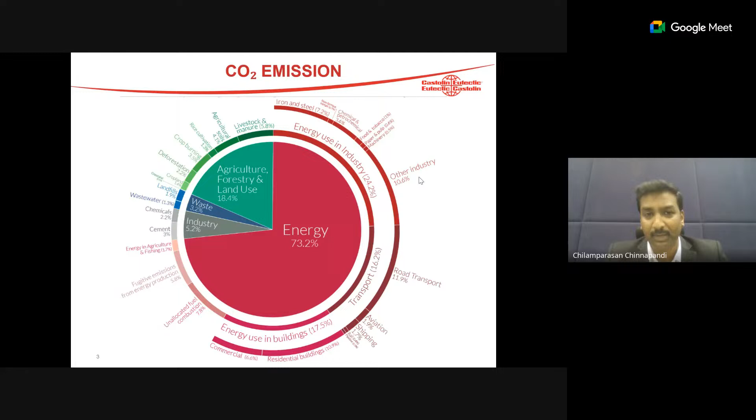So what is happening with the CO2 emission? How is it going to affect things globally? It's affecting the impacts and consequences of CO2 emission, which is rising the global temperature. Especially people aware who are already living in the Middle East know the current scenario this year. The summer has started very early, and when we go out we feel that we are in a furnace. And year on year, it is going to increase, obviously.

But from our part, how are we able to reduce CO2 emission, especially for industrial growth, that is what our focus is on.

So what is happening with the rise of global temperature: shrinking water supplies, geographical changes, changes in weather patterns, changes in food supplies, acid rain, and increasing sea level. All these are happening because of the CO2 emission currently happening.

I'm not an expert in the environmental field, but we are into maintenance and repair, through which we can help the world work together. That is our objective today.

So how can Castolin give you sustainability? Welding can give you sustainability through technical systems and efforts, offsetting against the consumption of resources and quality. In general, if any component breaks down or gets worn out, what people generally do is skip repairing and just go for replacement.

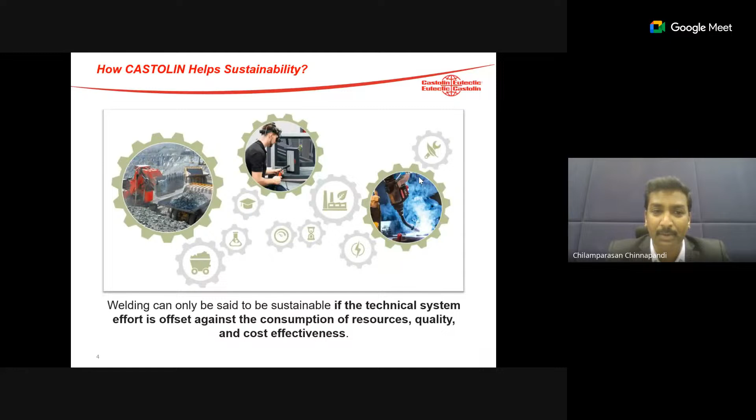So we are not against going for the new component. We are trying, wherever possible, to utilize the resources to refurbish or reclaim the component, so that we can utilize the same component to enhance its life.

In terms of Castolin, it started in 1906 in Switzerland, and we are the company who started the welding of cast iron to make it weldable. Before that, if any cast iron parts got broken, they would just take it and do recasting. But every time it's not possible. So Castolin is the company who invented that it can be repaired with our specialized brazing alloys.

Sorry, Chilam, your voice is broken. Sometimes your voice is broken. Please check your microphone. Are you able to hear me, sir, now? It's clear now. Okay, great.

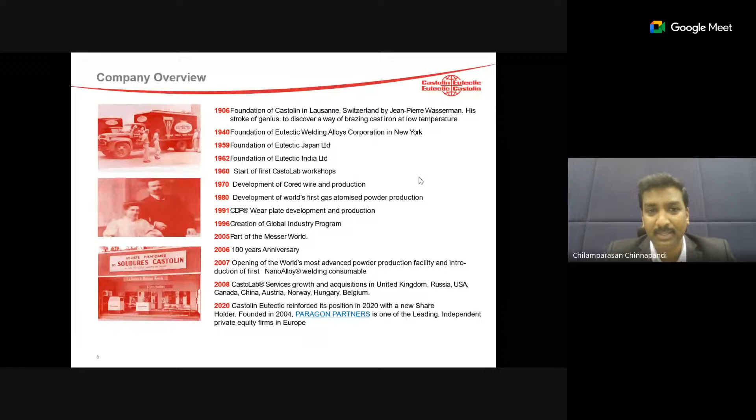So in terms of cast iron, that's how it started in the world. We are the one who invented that cast iron can be repaired. That's how it started. Now we have products and solutions where we can repair any type of unknown steel, dissimilar joinings, and repair or refurbish components by welding, thermal spray coating, ceramic coatings, or in terms of all the wear and tear solutions. So we have almost 120 years of legacy, and now we have a head office in Germany.

We have almost 1,600 plus employees, 10 supply centers, and 22 service centers, and we have 6 regional offices. I'll just go through this.

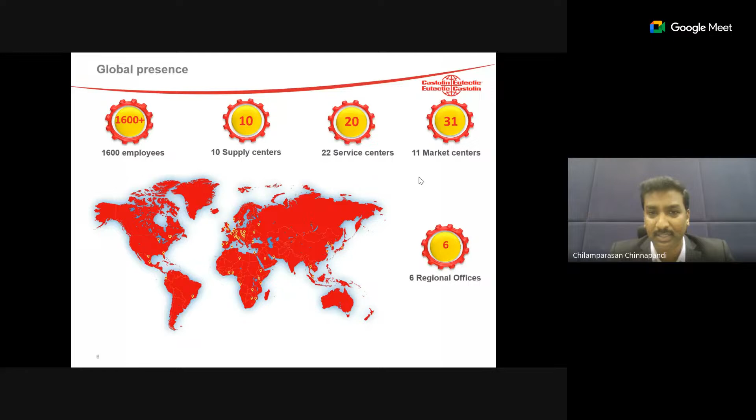Our mission as a 100-year-old company is to give solutions to customers who are having challenges of wear and tear, with welding, brazing, and coatings to enhance the life of the component. Even now people are talking about the carbon footprint, but Castolin started way back trying to do the reclamation of components to reduce the carbon footprint, very long ago.

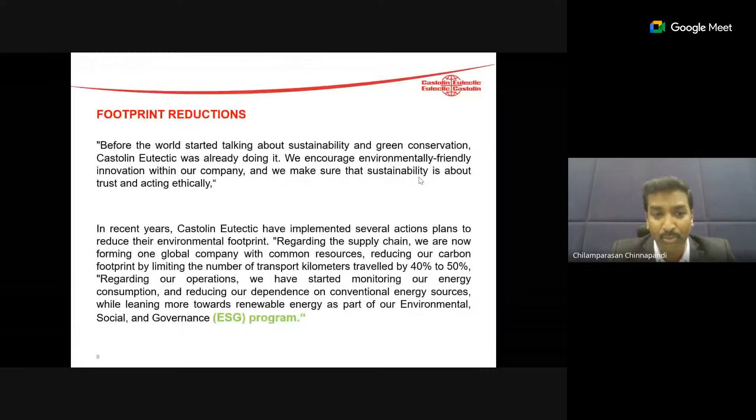And now we have the program called ESG, Environmental Social Governance, where we are trying to reduce the transportation of components or raw material around the world, wherever possible, so that it can reduce the carbon footprint by 40 to 50% by doing things very effectively.

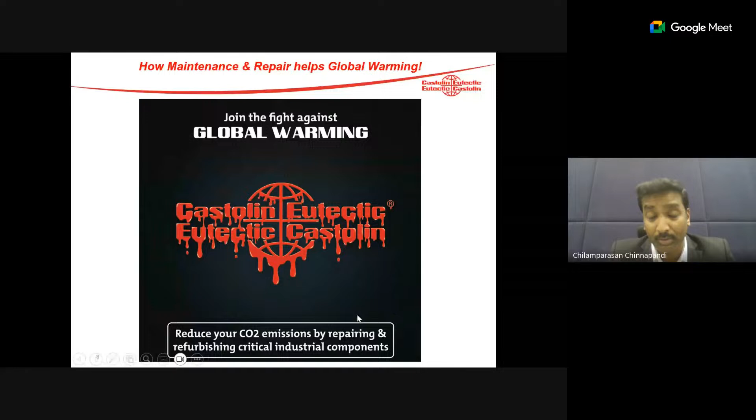So, as we mentioned, we are fighting against global warming, especially Castolin Eutectic, by reducing and doing the refurbishment of the component. At the same time, sustainability - not just like any company doing profitability and all this, we have a responsibility to keep this global for the next generations. So that is very, very important.

That's why we are trying, wherever possible, to reduce the carbon emission and CO2 footprint, to give this kind of society, the same way we are living, to the next generation. That is also one of our responsibilities.

In terms of AMESEA - Africa, Middle East, Southeast Asia - Castolin is a global company, but this AMESEA region is being handled by our Dubai office. From here, we are handling the complete red mark presence countries currently.

So in terms of products and services, we are into welding, coating, we manufacture welding equipment, and we manufacture wear plates, weld-clad pipes, for transportation of chutes and hoppers. For example, if you're using a normal carbon steel pipe for material transportation of limestone, clinker, aggregates, or iron ore.

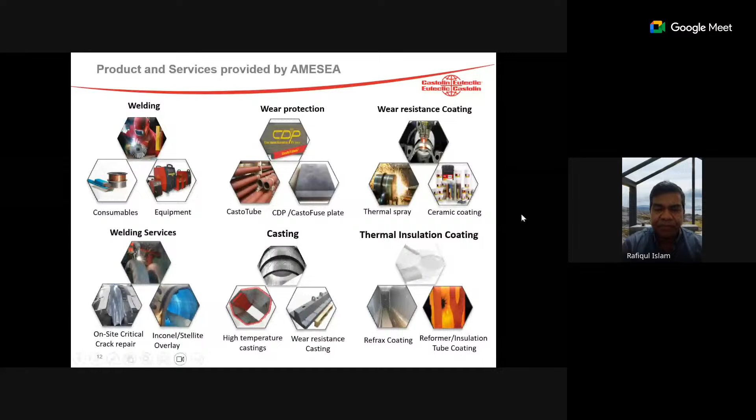Your voice is cutting. Chilamparasan, your voice is cutting. Voice is not continuous. It is really something disturbing to the audience. Can you please correct your microphone system? Is it because of an internet problem at your location? Is everyone able to hear me properly? I'm also hearing very clearly, actually. Okay, yes, we can hear you.

Okay, then go ahead. All right, thank you, okay.

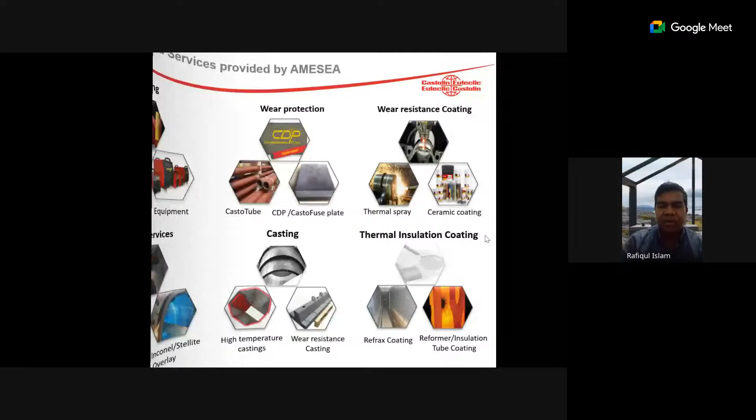Instead of using carbon steel where material is being transported, like chutes and hoppers, which gives only 6 months life, if we use our cast or welded CDP (cast diamond plates), you'll be able to increase the life up to 10 times.

If you're using a Hardox plate and switch to our product, with the same mass and thickness, you'll be able to increase the life up to 4 to 5 times.

If you are using Hardox or similar, you should not use Hardox. You can consider a QNT, tempering and quenching plate. If you use our product, it can give you up to 4 to 5 times better life.

This way you'll be able to use the same component for many years and reduce downtime, while improving availability of the component and utilization of your manpower. Some of our other applications include wear resistant coatings.

The wear resistant coating can address corrosion, erosion, abrasion with high temperatures. It can be utilized on vessels with acidic conditions, highly sulfuric acid, seawater, or high salt content. For all these we have solutions for high temperature corrosion coatings.

The corrosion coating can be thermal spray, metal spray, ceramic coating, or a combination of these products. Based on the application or severity, we can give you customized solutions.

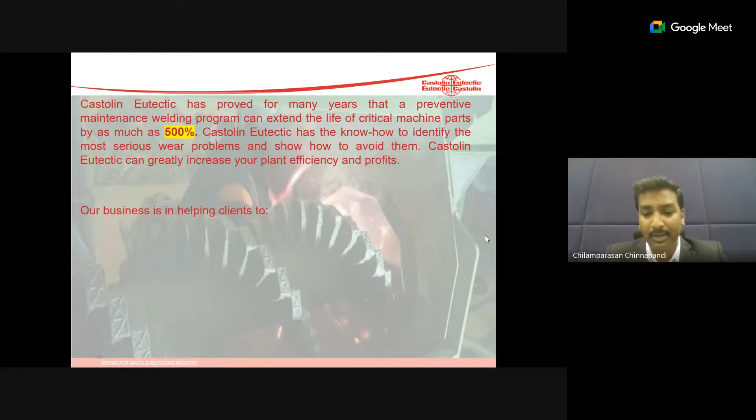We'll be able to reuse the product by doing welding, coating, or other methods. This can reduce your maintenance cost, enhance plant performance, increase working capacity, and reduce downtime, all possible by doing reclamation or refurbishment of the component.

We also conduct eco tests in our facility for any company that wants one. For example, if you're refurbishing a job every 6 months at a cost of $1,000, with our products and services we can bring the maintenance cost down to 500 or 300, extending the life to 2 to 2.5 years. So you invest a certain amount and get results through maintenance and repair with our products.

So compared to normal traditional repairing systems, Castolin is going to give you 3 to 4 times better life.

For example, take gantry crane wheels used in ports or steel plants, which wear out on a monthly basis and have to be taken out. They have to bypass operations, take outages, dismantle and remove the component. That itself costs huge amounts, and you also have to keep stock of the component at all times.

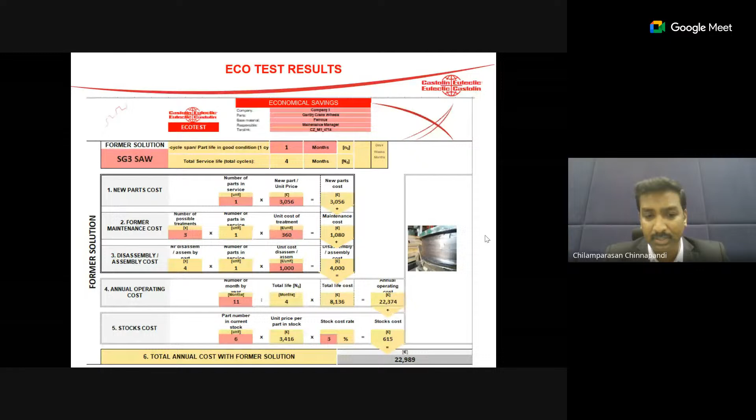In this particular area, with traditional repairing systems they are spending almost €22,000. With Castolin, which gives 3 to 4 times the life compared to conventional repairing, you will be able to save up to €15,000.

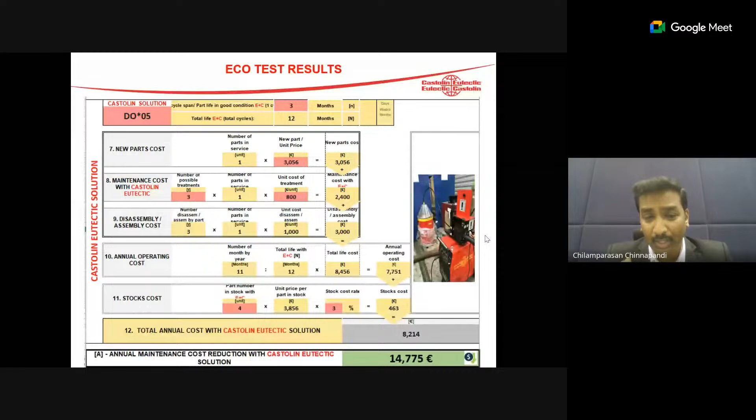With Castolin, the availability of the equipment will be longer. This isn't just from a commercial point of view - when you have these kinds of savings for the company or organization, it also gives benefits to your environment.

How? Because when you do the repairing instead of buying a new component, you're investing the same amount as the original component, but otherwise they would have to use energy and raw material from somewhere.

For these particular applications, the energy calculation factors show they would use 26.54 megawatt hours, and the price of a megawatt hour in France or Spain is €180. So the total energy savings itself is €4,778.

At the same time, by doing the refurbishment, the annual CO2 emission reduction would be 4.74 tons. This is a huge saving that we might not fully appreciate, but it gives these kinds of benefits to the world and the global environment. So this is the indirect support we provide for the environment.

We are also moving forward with upcoming hardfacing products. In general hardfacing, for wear and tear problems like abrasion and erosion, Castolin and other companies typically use chromium and other elements. Now we are coming up with a new product that doesn't have chromium or nickel, especially for hardfacing.

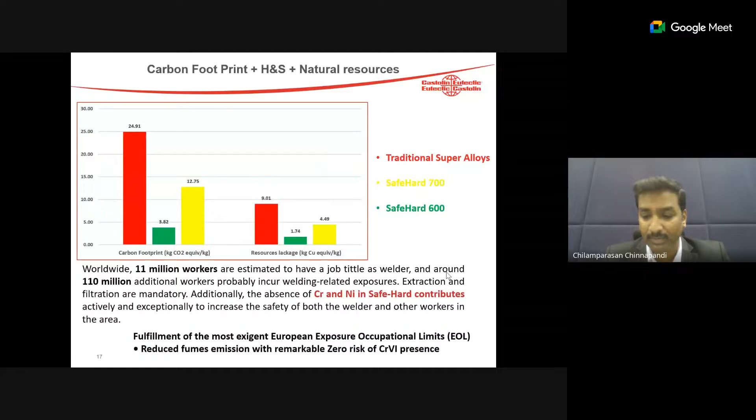So by doing this, we are able to reduce the carbon footprint and we are reusing the components, and at the end we'll be able to recycle it.

Waste-to-energy plants and many other things are coming, and have come already. Even now, cement plants and other areas are using alternative fuel like wood and tires to reduce landfill, and they are using it for supporting the environment.

So these are all things we are talking about in general. Now we are going to come up with some solutions on how this can correlate to your applications currently.

So far, is it clear, sir? Any doubts, please ask. Yeah, I have a question, Mr. Chilamparasan. Yes, sir. You told about this refurbishment - your workshop in UAE, you have, right? Yes, sir. Or do you send outside of UAE? Both are available. In each and every country, we either have the workshop or we have technology know-how partners. I see. So we are in the presence of 100 plus countries globally. Either UAE has a workshop - yes, we have the robotic system in UAE, and we have the specialized workshop where we do the welding overlay of inconel, stellite, and we do the ceramic coatings. We have the complete setup in UAE. I see, where is it, in Dubai or Abu Dhabi? Dubai, Jebel Ali Free Zone. We can continue the question session later. Please continue the presentation first, and then we will talk. Okay, you will have 20 minutes more. Please continue the presentation first.

Okay, right. So this is one of the classic examples. We are going to talk about some of the products so that process industries people will be able to correlate this application into your current problems, so that it can help.

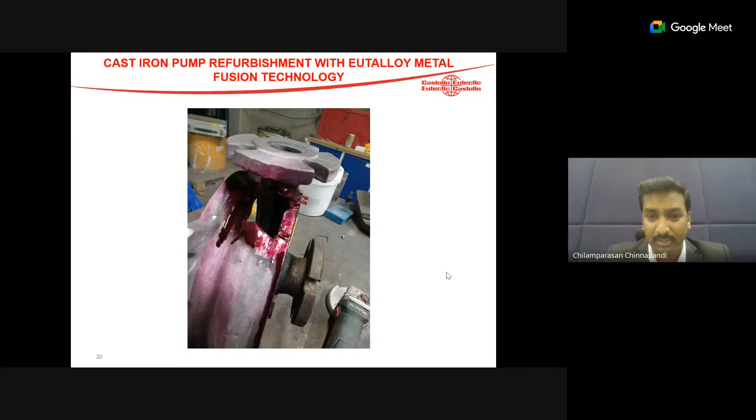So this is one of the cast iron pump that got completely damaged here. You can see the condition of the pump. By looking at it, people will just reject it, say it cannot be usable, throw it out and go for a new component. But we have other plans - our products and services with metal spray will be able to repair this component.

We especially have nickel powders that can be used for cast iron applications. This will be sprayed, and it's like a metallurgical bonding - similar to welding, but it's a metal fusion technology. We have our own range of spray equipment and powders, and we can provide training to your team itself. Either we can do the job, or if you have similar jobs, you want to train your team - it's possible. We have trained engineers who can give you training at the customer site.

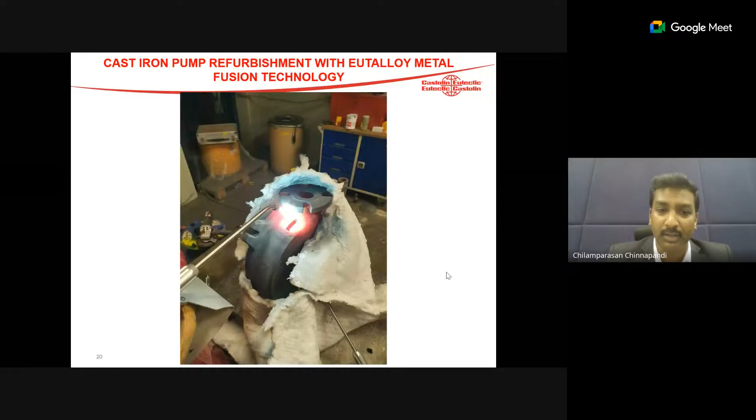So after this job, this is the result after refurbishment. Similarly, you can see one of the other pumps which is heavily damaged - you can see complete hole punctures on the back of the pump. This has been slowly built up to shape, and it can be reusable. The advantage is, it is not just any kind of metal putty where you will have strengthening issues. This is metallurgical bonding - it becomes part and parcel of the equipment or component itself.

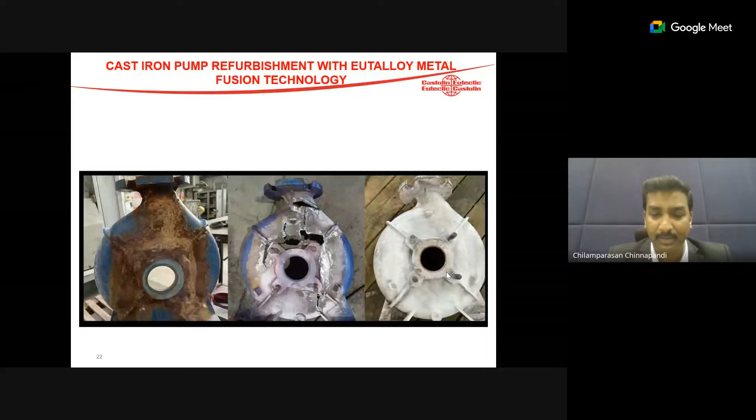And we are specialists in vessel, tower, or stripper column coatings, especially for corrosion and erosion resistance, for fertilizers, oil and gas, steel, or even the bag house of cement industries. We have specialized coatings for corrosion and erosion at even high temperature.

This is one of the jobs done by our team at Saudi Aramco, where there's a stripper column of the amine vessels. In general, for any vessels, it's very difficult for any organization, OEM, or designer to go with the complete component using specialized material like Monel, Inconel, or Hastelloy. This is very difficult because the cost of the equipment will go exorbitantly high. So what they do is go for carbon steel. But the problem with carbon steel is that over time it will get corroded, eroded, pittings will start, and it will start losing the original thickness.

Then you are forced to change the complete vessel. This is going to be a huge cost and time, with non-availability of the plant and so many other things.

So what we do at Castolin, we do the coating of inconel, stellite, hastelloy, or any wear resistant spray coating on the vessels to bring them to the characteristics required to maintain the parameters of their vessels. For example, the vessels require resistance to erosion and corrosion at a high temperature of 650 degrees. We have the coating that can sustain this kind of erosion and corrosion, and we can give a warranty up to 5 years. So we study the application, produce techno-commercial offers, and we are able to execute the job at site.

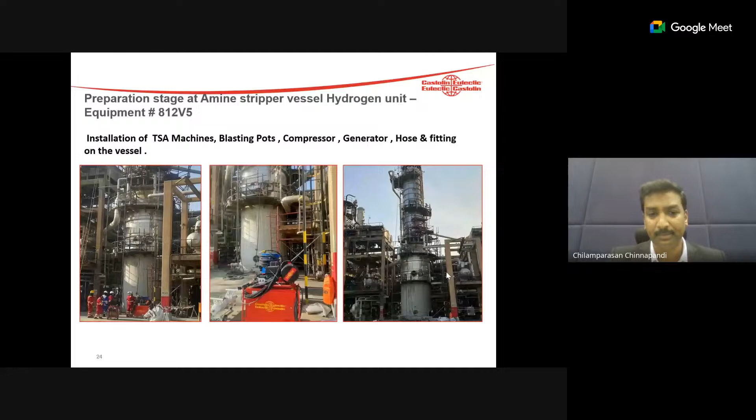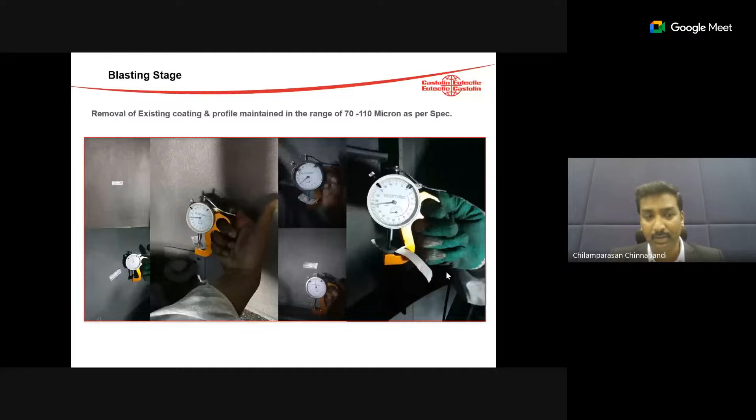So this was the condition of the component in an open condition where the existing coating had been damaged. We did the inspections, including a joint inspection with the customer, and removal of the existing coating while maintaining the profile. We needed to completely remove the existing coating because it had pitting, corrosion, and damage. So we had to remove the complete coating and do blasting to avoid any moisture content, and maintain the profile before spraying.

We did the thermal spray coating using what we call the High Velocity Thermal Spray, HVTS process, which is sprayed onto the vessels to avoid corrosion and erosion. But generally in the HVTS process, or any spray process in general, there will be porosities after the spray, up to 5% to 10%. So that has to be sealed before it goes into operation.

So we have a specialized sealant. We use a specialized high temperature sealant to ensure that all porosities are completely sealed. We call it densification also. At the same time, the coating's inner layer, the ULX sealant, will also work as a corrosion resistant layer. So the matte finish of the coating will be smoothened, and at the same time it will be completely sealed.

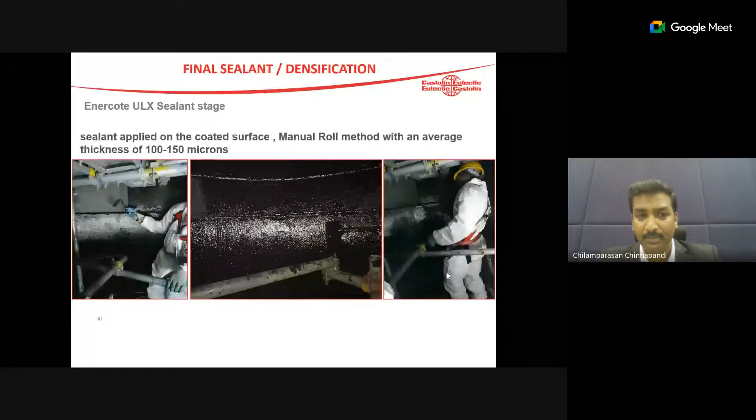And in some areas where there's a problem with pipe ID, where you cannot do any cladding, we have a specialized tungsten carbide spray, which can be done with a minimum of 3 inches. Where you're facing a problem of erosion or corrosion from fine particles passing through and causing high erosion, we have excellent corrosion, erosion, and abrasion coatings with tungsten carbide using our HVTS technology, which can extend the life from 9 months or 12 months to a minimum of 30 months.

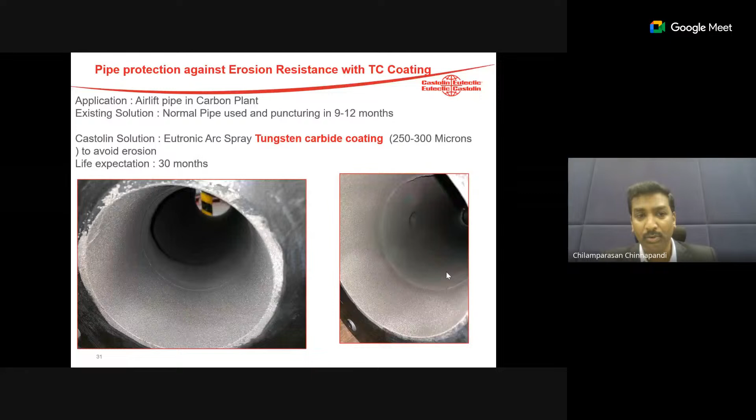So what is happening in terms of the welding industry? We are also in welding, and there are many other companies in welding too, but we specialize in M&R, maintenance and repair. Other companies focus more on AWS specs, which come under codes like 7018, 301, 319, 312, but we don't talk in that kind of language. We talk only based on the applications.

For example, cast iron has almost 15 to 20 different electrodes used for it, because over a period of time in service, the product becomes fatigued, develops induced stress, gets heat affected, and encounters many other problems. So a normal electrode will not work again. We have a high alloyed electrode product which gives better strength, low heat input to the base material, so it can bring the component back to its original shape, and at the same time enhance its life.

So in terms of life enhancement of the component through maintenance and repair, it can increase your productivity and at the same time reduce costs, giving cost savings as well. In terms of validity and reliability, you can have something valid and reliable, or valid but not reliable, or not valid at all. But we need to focus on valid and reliable, so that we can achieve what is needed for the organization. What this means is that the reliability of the product should be higher.

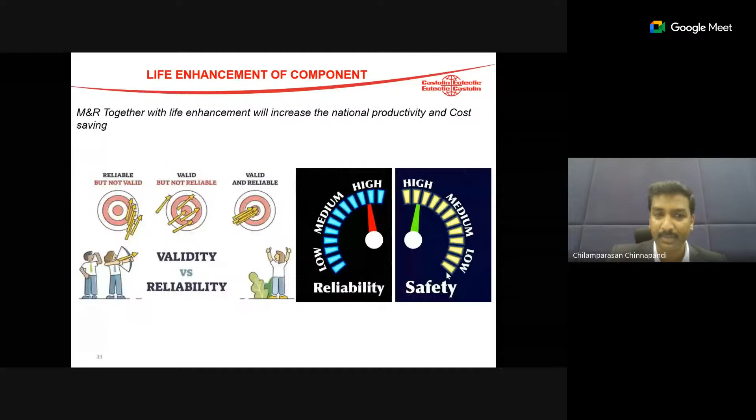This is one of the very unique applications called bath lid, where the tub has a cryolite process with a temperature of 750 plus degrees. The tub has refractories, but the top lid doesn't have any refractories because of the weight — it has to lift up and down. At a temperature of 700 degrees, they pour the material.

It comes back to normal temperature, then again goes up to 750 plus, then again comes to normal temperature. Because of this, there's a thermal shock, which leads to the sigma phase of the component, and it leads to cracks and punctures.

The customer used to do repairing every 15 days alternately. They'll get punctures, put one patch, and run it again. The problem is the cryolite is very corrosive and dangerous because of the temperature, and if any punctures happen, there's a high chance it spills out too.

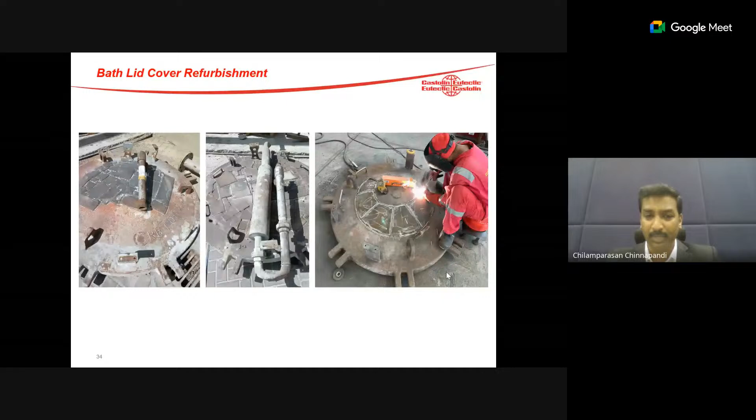So the repairing cost isn't negligible, but the real problem is health and safety issues, and again it has to come back to the workshop for repairing. We understood this application — we checked the thicknesses, removed the completely damaged areas, and rebuilt it with the thickness required for this component. Then we did the repairing with our specialized welding overlay alloy called 622.

It's a high nickel content electrode with the highest elongation properties, and it can work up to 1000 degrees. So it doesn't react with the thermal shocks — even if the thermal shock goes up to 1000 degrees and comes back down, it's not going to affect it.

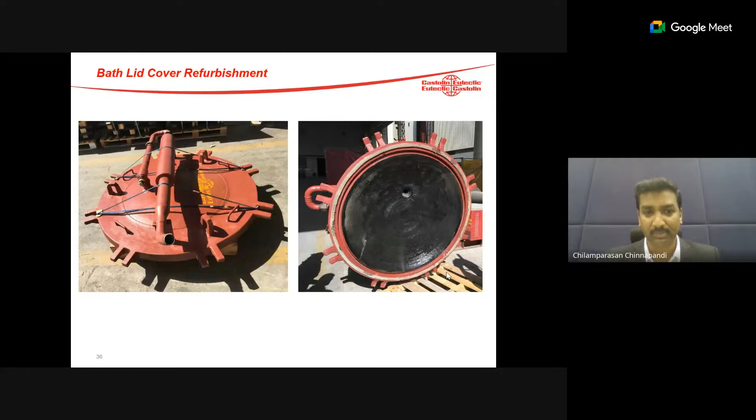It withstood what we gave in one of the trials, and the customer has gotten up to 4 years of life. It started from 15 days, and they've gotten 4 years of life, which means they can avoid the complete repairing process — the component is available anytime, and it's a one-time investment. This photo is after 3 years, now it's going to cross 4 years, and it's still in intact condition — you can see the weld bead here.

The new component price is $30,000, replaced every 2 years because of the patching they do, with repair intervals of 15 days once. The price of repair and protective welding with Castolin is $9,000, and the current life they're getting is 4 years. So the benefits include a new component, repairing costs, labor cost, and production loss altogether — the customer is going to get huge savings by doing this protective reclamation process.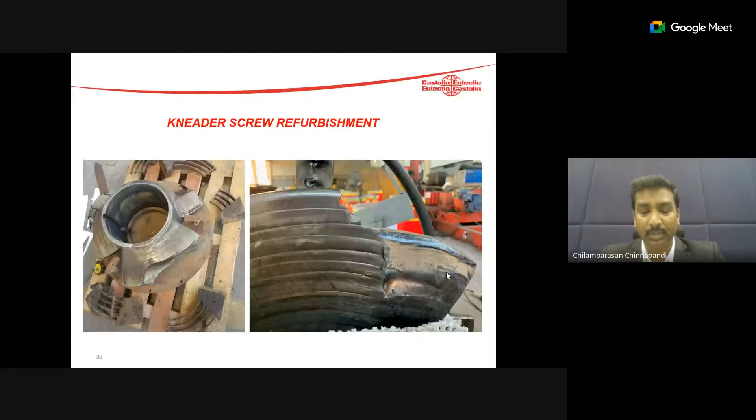We gave them much better results than the OEM supply, with a better tungsten carbide cladding, so it's going to give them much better results. Then the customer changed the complete system with our product, and now it's running very smoothly. For intermittent welding, they do it with our specialized MIG process using tungsten carbide wire, so they are very happy.

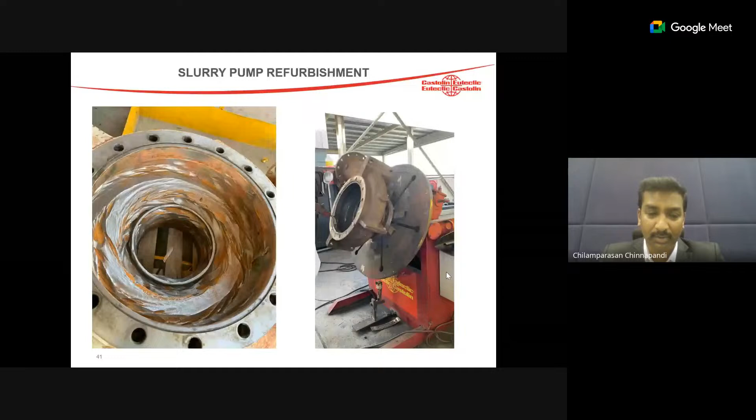Another one of the OEM pump manufacturer had this issue with a slurry pump where fine solid material is passing through the pipes, and they were about to scrap it. We have done the rebuilding of this component, and this is the result - almost as beautiful as new, and much better than that.

There is always room for improvement. Earlier we used different alloys, iron carbide and other things. Then later we improvised with tungsten carbide cladding, which has 70 HRC. It can take high erosion and corrosion. It has given exorbitantly better life compared to the original OEM component.

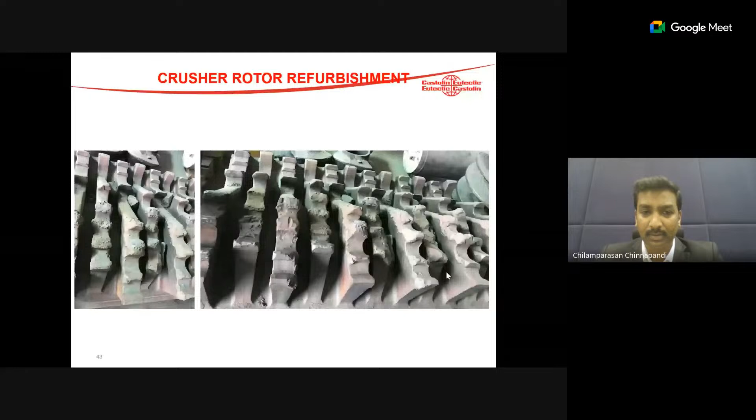This is one of the crusher rotors - see the condition. We rebuilt it as per the template, and we did protective hardfacing with 4623i, which is a titanium alloy that can take high impact applications. And this is the result.

We can manage templates as per the original supply of the component, so you can bring it back to life and keep it for inventory, or replace it. Again, you can do the refurbishment at your site so that availability of the component will always be there, and it can be done at site conditions also.

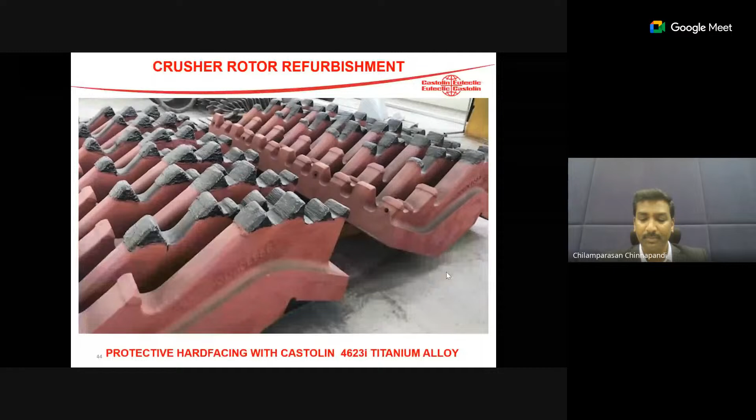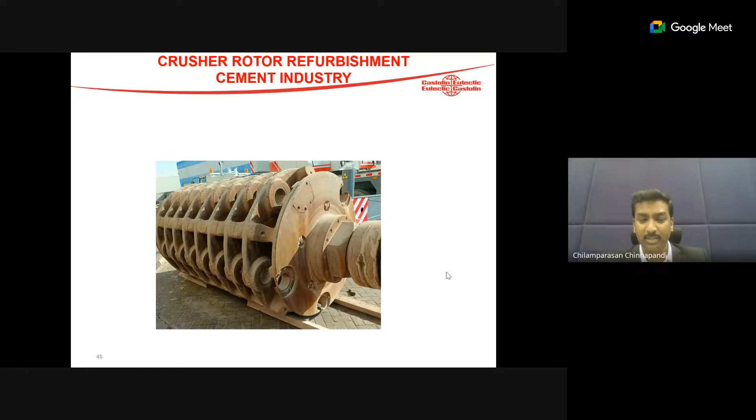This is another application where the crusher rotor is for the cement industry. This is the condition - the side and complete part has been damaged. This is the outcome, the final outcome.

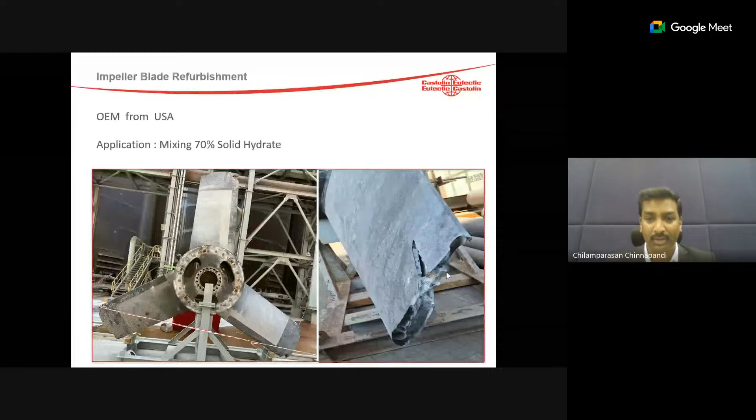So what we did was take the original component. We have 3D scanning equipment in our facility. We completely scanned the component as per the original shape, took the dimensions, and did complete reverse engineering of this component.

We were going to bring it to the original shape - earlier they were using chrome oxide coatings. The customer was doubtful about bringing it to the original shape at first. Then we said, first we'll bring it to the original shape and we'll give the same chrome oxide coatings. We got it to the same shape.

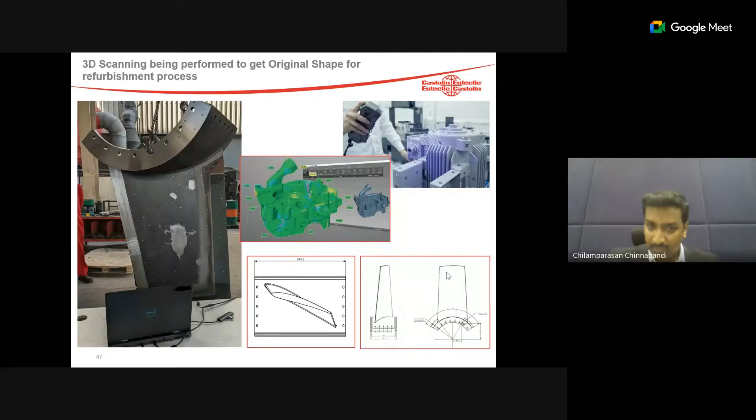The customer is very happy. Now we have a proposal for coating with high velocity oxyfuel coating, which is tungsten carbide coating, which can give you a minimum of 4 to 5 years compared to the OEM coating of chrome oxide, which is 2 to 3 years life. So not only do we bring back the original shape, we'll be able to give you value addition by thinking about additional life of the component through different kinds of technology adaptation. That is also possible with Castolin.

Other than this part, we have innovation on the maintenance and repair jobs. How is it possible? Like any pump or component which is in really good shape, but only the thread has gone - you cannot throw it out. So what we can do is use the titanium metal putty that can be mixed and applied, and rethreading becomes possible.

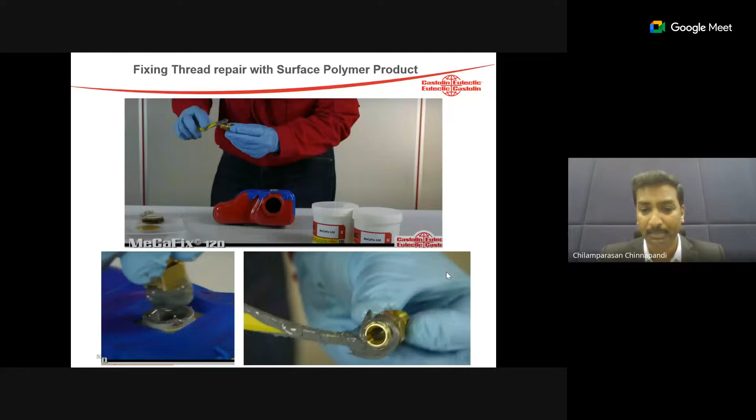So there's no need to throw away a component which is in very good shape just because rethreading was not possible - any of these issues can be brought back to shape with very high tensile strength metal putty, which we also have. We also have fast curing putties where, if you have a bypassing system and material is spilling off and you want to immediately repair it, that is also possible with one of our metal putty technologies. We also have wraps available.

So that can be discussed separately if you are very interested in those parts.

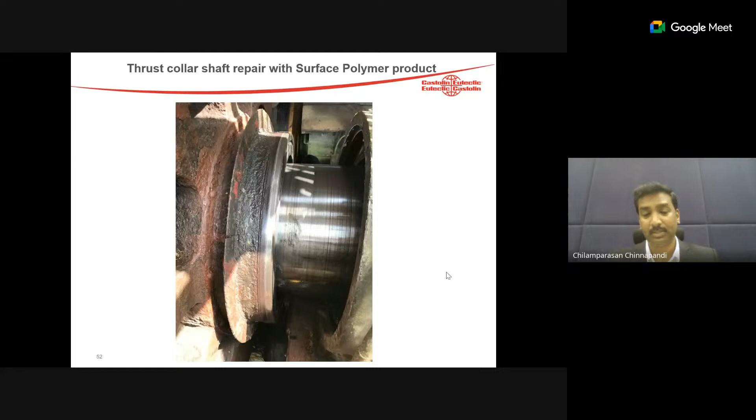This is one of the interesting components, which was supplied by the Japanese 45 years ago. They don't know the composition of the component, and it's the only one available with them. There are 9 thrust collars available in the plant. They don't want to touch it by welding because there's a high chance of heat input causing it to crack, and once it cracks, they cannot use it. So they came to us asking how we could repair this, and we provided a specialized titanium metal putty.

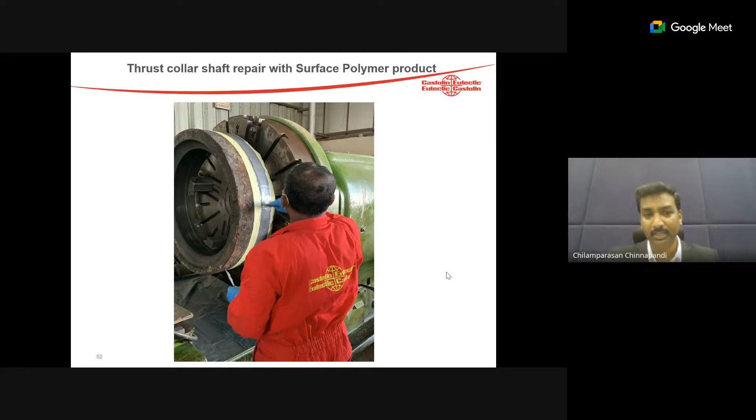We did the undercut, applied the metal putty, and did the machining. That was the first job we completed, and the customer has shown the picture. After 3 years, this is the condition. They then sent another 9 pieces for our repair, and they are using them now.

So in terms of welding, brazing, coatings, ceramic coatings, or thermal spray coatings, anything related to wear and tear, we'll be able to provide you such solutions.

Then there's a high chance that, not only because of this small part, they can stop the plant also because of the environmental issue. So it is one of the critical components.

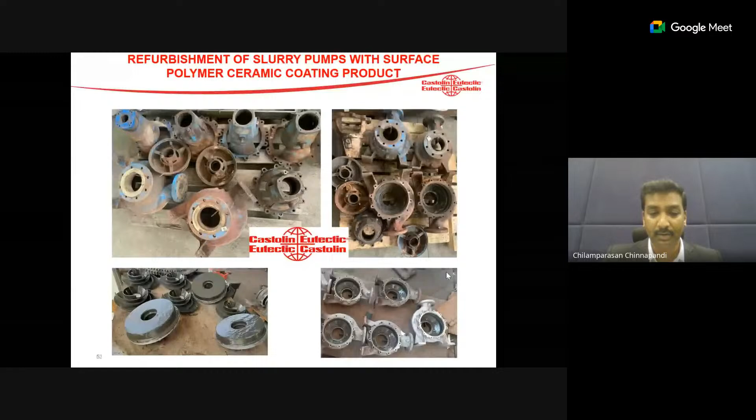We have done the complete refurbishment, and we are giving it to the customer as a complete turnkey job, including changing the sealing, bearings, shafts, and we assemble it and give it to them complete with a hydro test. We give them a ready-to-use product.

We were talking about environmental issues. Now, one more point is chrome plating. Chrome plating is one of the very hazardous processes available for piston rod coatings. We have been using it traditionally for so many years, almost 50 years plus, but we did not have any kind of options to go for a replacement earlier.

Now Castolin has come up with a hard chrome alternative. Generally, how they do chrome plating: they take the shaft or piston, dechrome it by chemicals, chrome it again by a chemical process, and then do the polishing. Because of this, the chemicals cannot be disposed of easily - it's very difficult. Now the government is not giving any new licenses for the chrome plating process because of the hazardous issues and the difficulty of disposal.

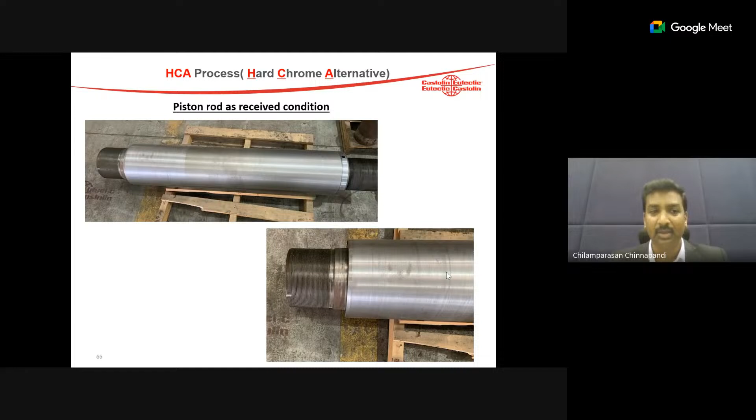Now Castolin has come up with a process that avoids the chemical process, where we just strip off the existing chrome plating and do the coating with chromium wire, using an automation process. So when people are near the component, they can use complete PPE and they will not have any issues. At the same time, this is not a chemical process - it's the safest process available. This is how it will be done: NDT, pre-grinding, and grit blasting.

So we just spray different kinds of wires, which can give you 3 to 4 times better life than the chrome plating process. We can give you this process or component as a complete package - we can supply the complete equipment, wires, and technology know-how.

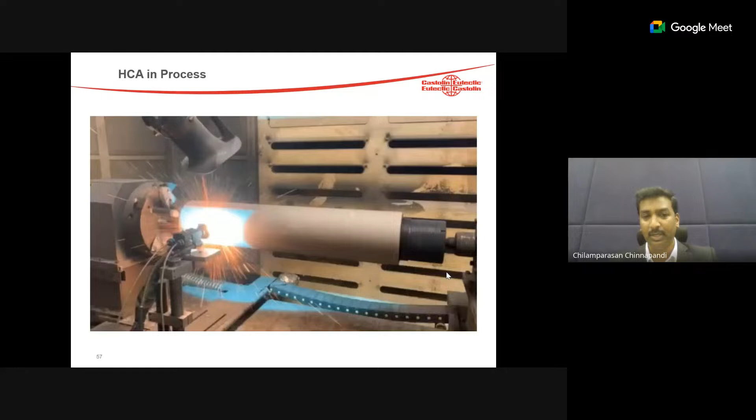If they are going to utilize it in a plant where you have a lot of piston rods, and you don't want to send it outside - you want this capability available within the plant - this is really possible. We can give the equipment, technology know-how, wires, and we can give them training as well. That is also possible.

So the life will be 3 to 4 times longer than the chrome plating process, it is environmentally friendly and easy to use - very easy to carry out the process - and it can be supplied as equipment, consumable, plus technology. This is called HCA, hard chrome alternative.

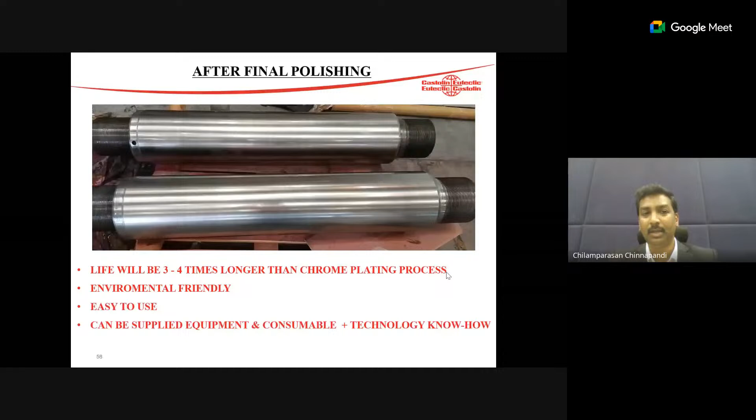So you can see the finishing, the surface finish as well. The surface finish will be excellent, and we can achieve a very good tolerance level for this process. With HVOF, the tolerance will be 0.03 to 0.05, and the RA would be 0.2.

This process or equipment can be used for atmospheric corrosion problems. If you're using normal corrosion paints in the market, it gets corroded again after 1 year or 6 months. We have very good solutions that work as cathodic protection of the component, where we can spray aluminum, zinc, or different kinds of wires which can completely protect your structurals. That's for atmospheric corrosion, and also for any seawater inlet pump valve.

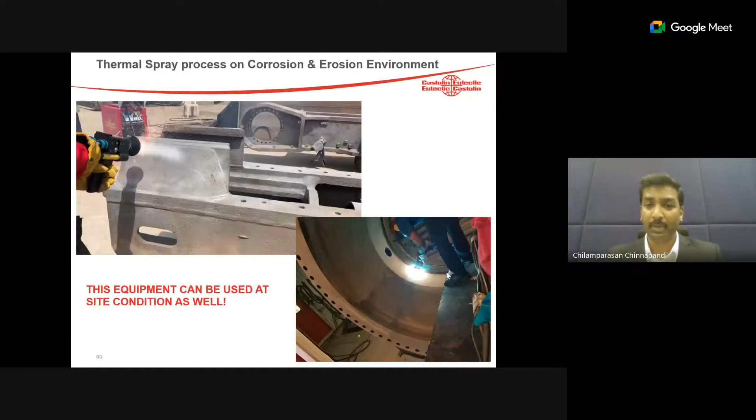And it's also available for tanks. Any tank getting corroded internally or outside, we'll be able to do coatings.

Not only metallic, we have corrosion coating for concrete also. Any basin or trench or other component where the concrete is getting acidic corrosion, we'll be able to repair that area and give you complete corrosion coatings on the base or the complete tank, not just metallic but also for concrete.

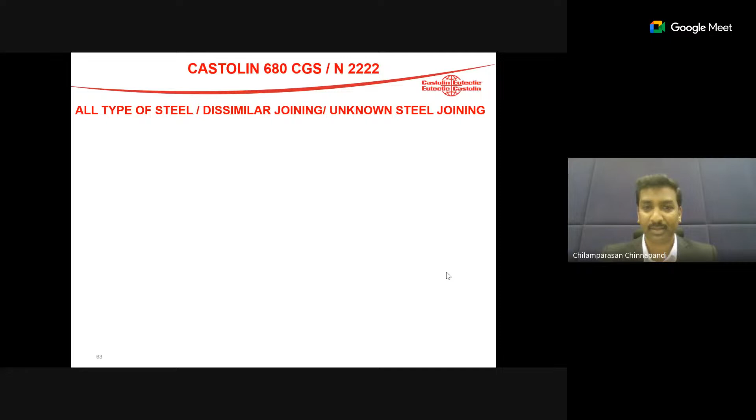And corrosion resistance coating on structurals, chimneys, stacks, mufflers, all this. As I mentioned, this is one very good product patented by Castolin. We call it Castolin 680 CGS, or another product called 2222. We call it Sarvaroga Nivaran in India, like one tablet for all your problems, because this electrode can join tool steel, manganese steel, stainless steel, low alloy steel, chromoly steel, carbon steel.

Even on top, you can see it's a file, and that can also be weldable. So one electrode, for a process industry's expertise, you cannot keep all different products for different electrodes in stock. One electrode can do all this welding, called 680 CGS, for 3 layers up to 15 mm.

Or where the temperature is less, with this particular parameter. If the temperature is very high, up to 1000 degrees, for furnaces and other things where cracks come again and again, you can go with our 2222 and forget the crack. Once you do this, you can forget it—you'll never get a crack again for this component.

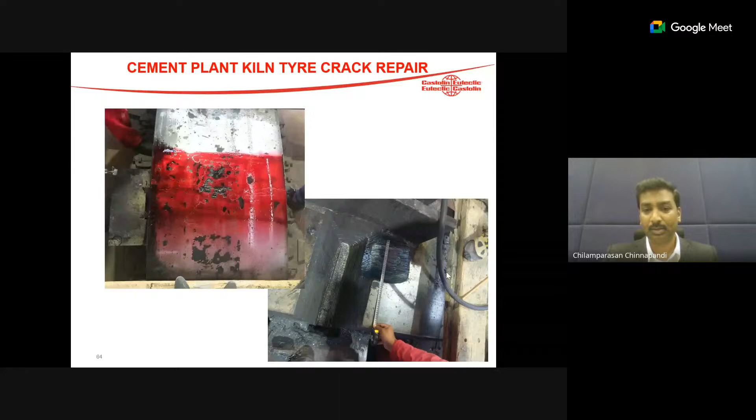This is one of the very specialized applications globally we have done, and for almost 40 years we are masters of kiln tyre crack repairs globally. You can see the depth of the crack—we checked it, and it's almost 130 mm, and the length is almost 150, but we have done up to 1 meter also. We gouged out until it reached the base where there were no more cracks.

Our team works day and night, keeping the interpass temperature readily available, and we do the complete rebuilding and grinding to shape as per the rolling.

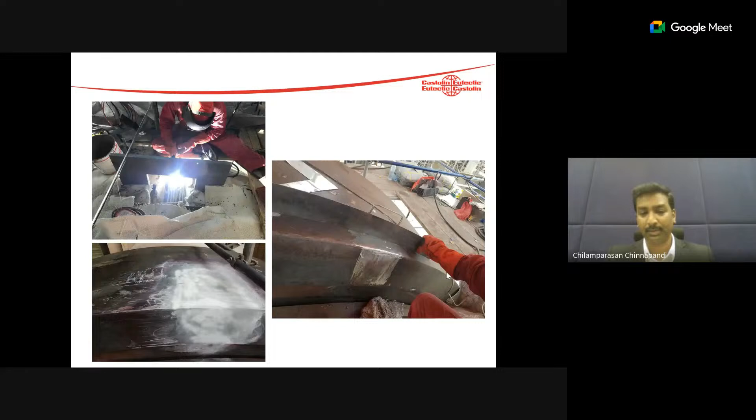So other than that, how can we improve fuel efficiency? You can save by doing some kind of coatings which can give you additional development. So as they say, necessity is the mother of invention. We need to come up with something that is a record for the future world.

Now we have the oxygen-hydrogen mobile unit where brazing can be done without any gases. You may ask, how is it possible to do brazing without gas?

In this process, the equipment uses distilled water as fuel, just distilled water. What happens is the water is separated into hydrogen, and you get a hydrogen flame. Hydrogen flame doesn't have any odor, smell, or color. So at the end of the tip, you just need to get color or smell by adding an additive of acetone, that's the only function it serves.

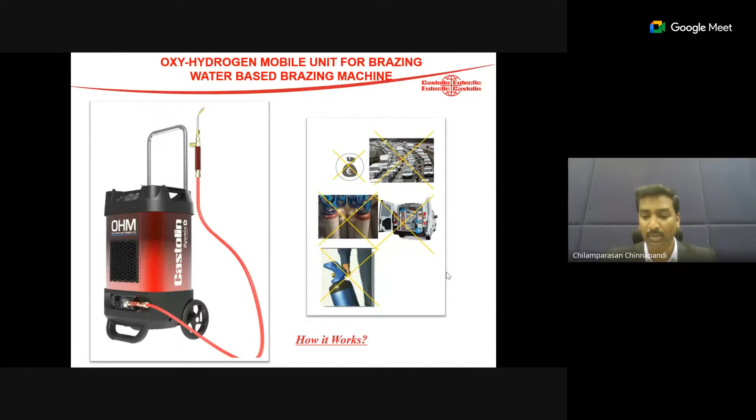It's nowhere connected with the process of getting this hydrogen flame. So how is it happening? You can see this. No gas cylinders needed, just a single-phase connection for the mobile unit. If you have industries, you can have a bigger unit by avoiding gases.

So this is amazing, right? This equipment has been launched in France and it's very successful. Hopefully in our part of the world too, I believe the gas cost will be very high.

Using this equipment, you can even carry it in a vehicle, a car also, whereas with cylinders it's not possible and not allowed to carry in our vehicles, where you need a 1 ton or other vehicle available. And you need to keep all the gases on the safer side, which is very difficult.

But this is one of the safest machines available in the world, being introduced by Castolin for the smallest one. We also have the industry version available, where you can connect 3-4 torches to utilize for heat exchanger or refrigeration industries.

For life enhancement in recycling industries, you can use it for tire shredding, metal shredding, and concrete shredding, or the grease trapping unit. We have the TIG process, MIG process, arc process, and coating process, with a variety of products for different waste energy applications.

So one thing about the boiler tube coating - we'll talk about only boilers now, especially for the boiler tube coating. If you have any coal fired boilers, CFB, due to the aggravation of the raw material, it is not just eroding the component of the boilers, which leads to leaks and other things, and it will cause problems with fouling and choking, and a lot of sticking issues, which can be avoided by doing our tube armor coating.

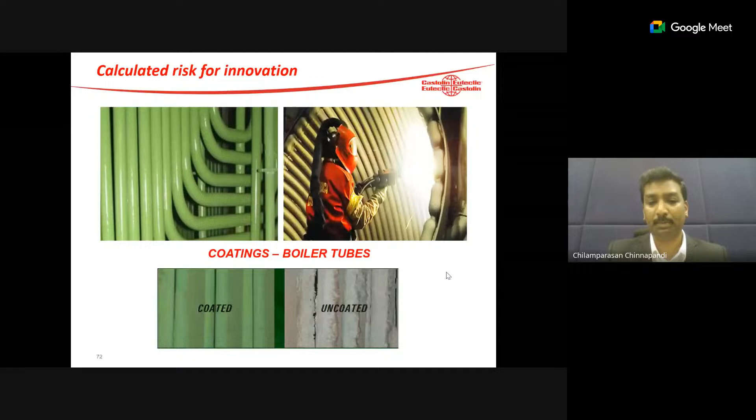The name itself is self-explanatory, tube armor. When you do this coating, you can avoid complete material sticking of any component. At the same time, it can give you power saving also. You may ask how the power can be saved by doing just coating.

You can see the video.

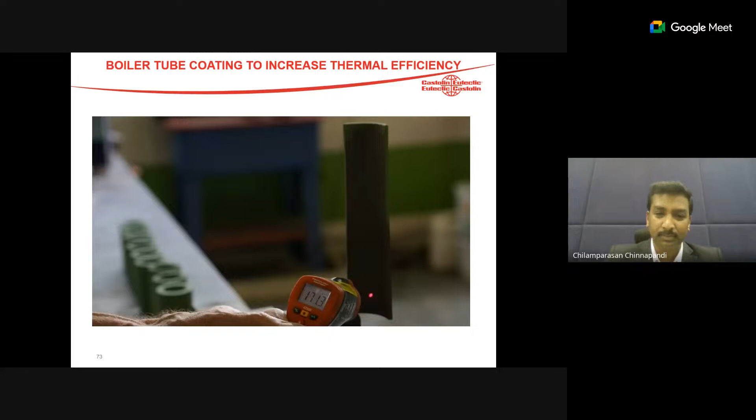So Eutectic is one of our ancillary companies which is running in the US. You can see when he was checking the temperature, the atmospheric temperature was 7 degrees in the US. Then the top part is coated and the bottom part is non-coated. So both he has done the heatings and checked the temperature, it's almost 50 degrees.

You'll be able to get savings. Why? Because there will obviously be heat loss in the boilers, but this coating will not allow the material or the boilers to lose the heat. It will keep the heat within the system to increase the life, and also it can reduce your fuel consumption. Fuel savings also possible.

And the last point, we have very less time, I'll just go through. We have two types of coatings for corrosion under insulation, especially on the traditional insulation methods, where sometimes you don't want to change to any new technology, but you wanted to protect the outside of the pipe.

We have the corrosion under insulation coating that completely avoids corrosion on the outside pipe. Then you can go for traditional insulation. So we will not know until this one is ruptured because of the corrosion under insulation.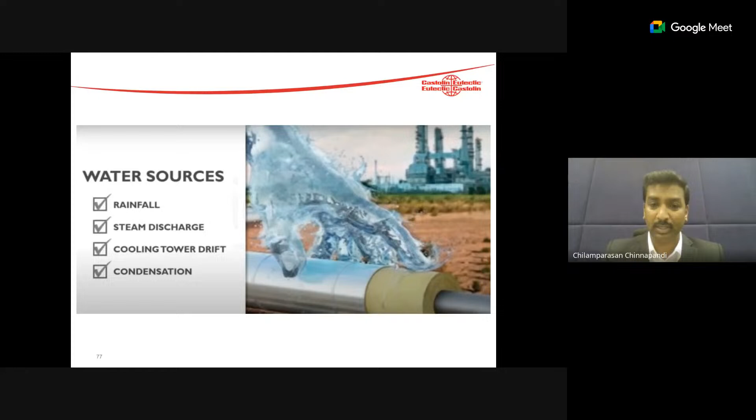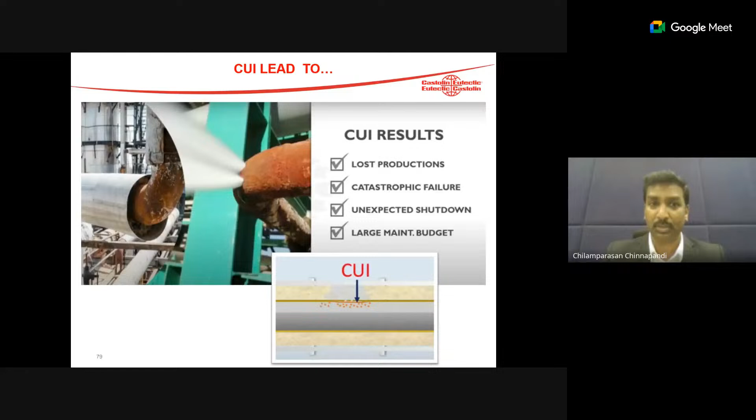Then we have the new technology called MecaGuard insulation coatings, where our 356 and 752 can be used up to 400 degrees on the outside of pipes, where it is for material transportation where heat is required within the pipe. This can keep the temperature within the pipe.

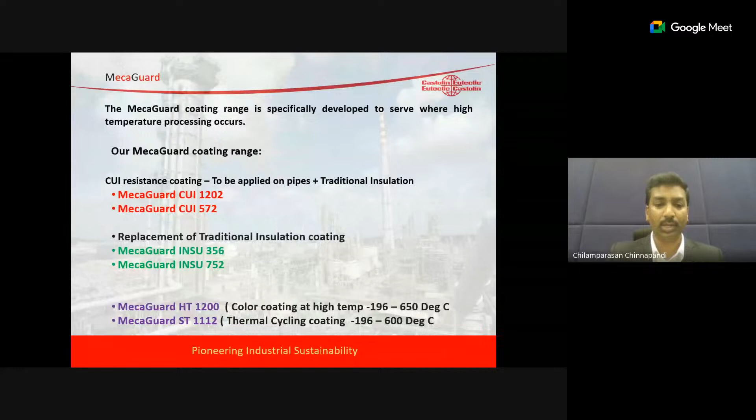At the same time, this is like a brushable coating, and it can completely avoid any corrosion and avoid complete traditional insulations. And we have a thermal shock coating also, where you have the problem on pipes where the temperature goes up and down because of thermal cycling.

It can work from minus 196 to plus 600 degrees. Because of thermal shock, if you're getting corrosion, we have a coating for that.

And we have color coatings also, from minus 196 to plus 650 degrees. So any color coating to be done where normal paint is getting faded, this coating will not fade up to 650 degrees. It can be used, and you can change the colors as per your requirement.

We can manufacture and give you customized coloring product. And this is one of the unique products where it can be applied - the corrosion under insulation, or insulation coating, can be applied on site, like online.

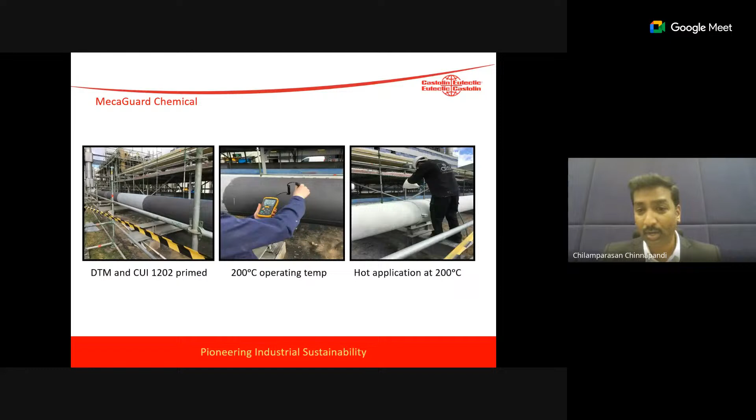For example, the temperature of the current ongoing pipeline is 200 degrees, and our product can be just primed and hot application can be performed. By doing this, we have done the 5mm coating, which is 3 coats, and they reduce the temperature 160 degrees outside. Internally, the temperature will remain as it is, what is needed for the system.

Outside, you can have a safe touch property. It can be done online at 300 degrees also. If there is any pipeline, no problem - we can do online coating of the pipe to completely avoid thermal insulation issues, with the traditional properties.

And the life also will be up to 10 years. And if there is any inspection to be done, it can be removed and they can check the pipe thickness also, and you can do the recoating by yourself.

We can give you some of the component within your facility that you can keep, because it's a single component, not a mixed component, so it has a longer life. We can just mix it in and apply it, and it can be used.

And other than that, we also do training programs for engineers or people, welders or maintenance M&R people, where you want to send the team to our facility in Dubai. You are welcome - we can have 3-day sessions.

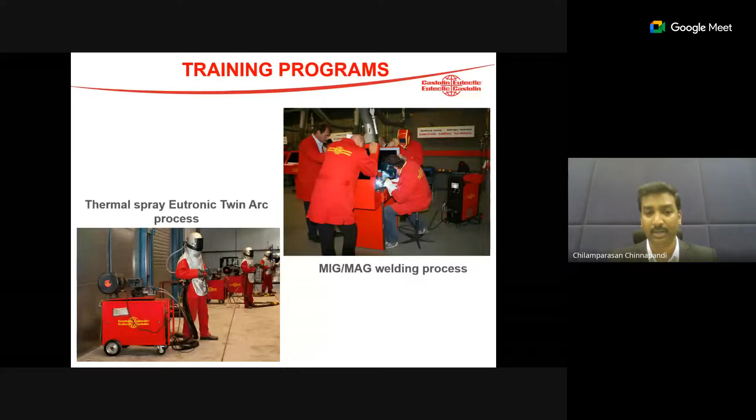We can work on the current parameters, what is to be used, what product is to be selected, whether the component can be repairable, or how we can judge - that can also be discussed in our facility. All this is possible in our Dubai facility as well.